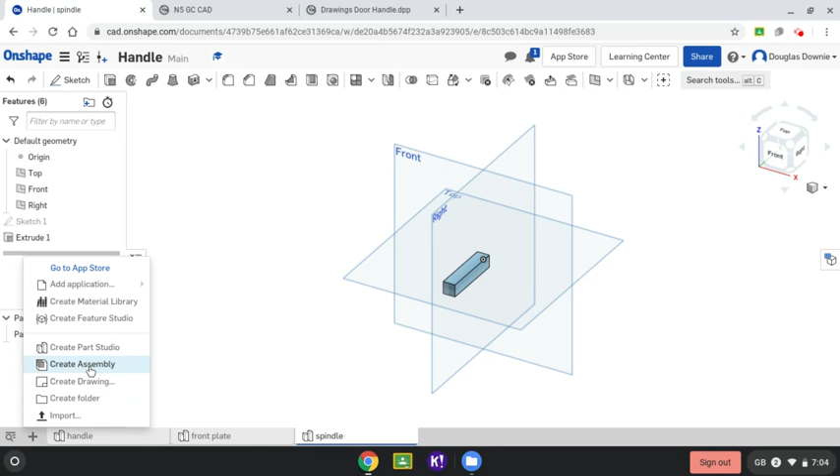So we're now going to the plus key and select assembly. We're going to assemble all three, and I decided I was going to start off by inserting the front plate.

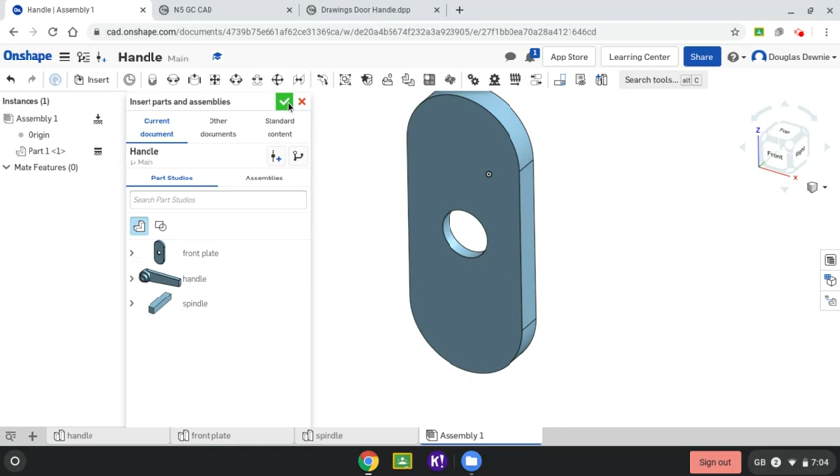Just click anywhere, right click, and then fix it. We're then going to insert the main handle. As you can see, it's kind of inserting sort of back to front at the moment. Anyway...

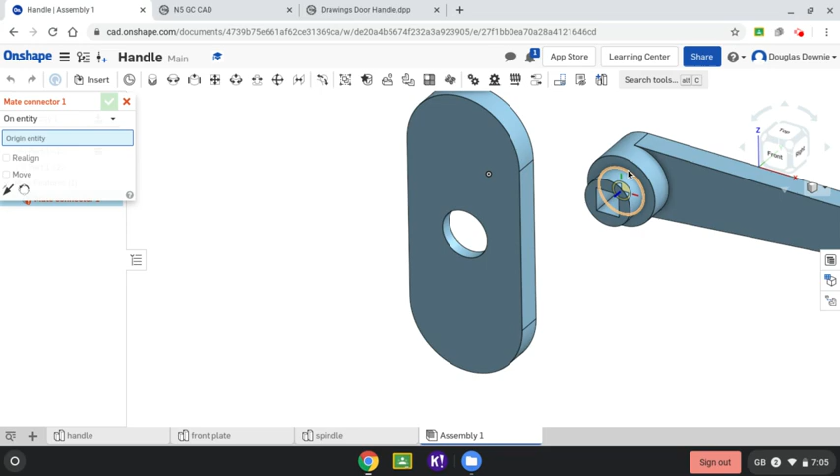So move that out the way just now. And then we're going to, remember, use these mate connectors. So I'm going to put a mate connector in here, and you can see it automatically selects the center of that circle. I'll just zoom in a little bit so you can see what I'm doing. So if I move it over, this is the surface I'm wanting, but it automatically selects the center.

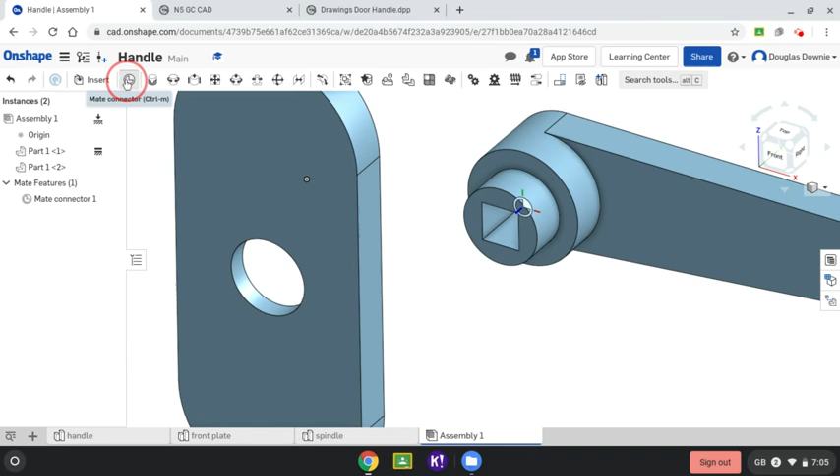Right, so you click, and there you go. You can see mate connector 1, click the green tick. And I want that to go there - this is where you've got to try and imagine where it's going to go. So I want it to be at the front. So that's mate connector 2.

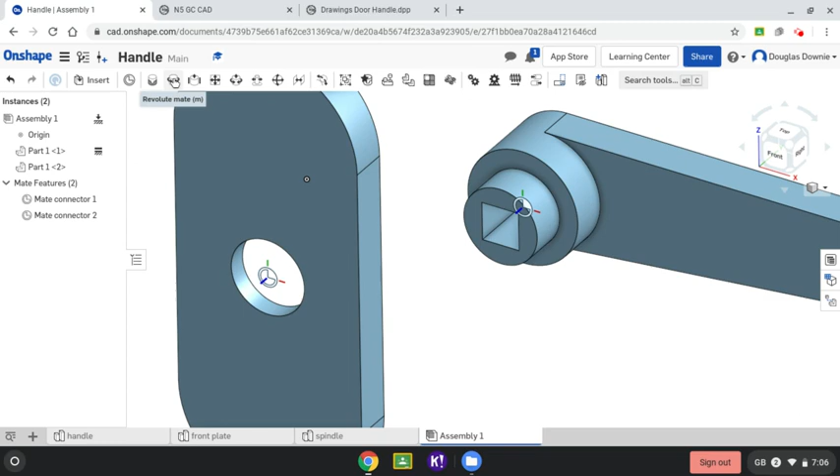And then we're going to join them together. Now what we're looking for in this particular case is a revolute mate - that one there. So I'm going to select that mate connector, and then I'm going to select that mate connector. And you can see it puts them together.

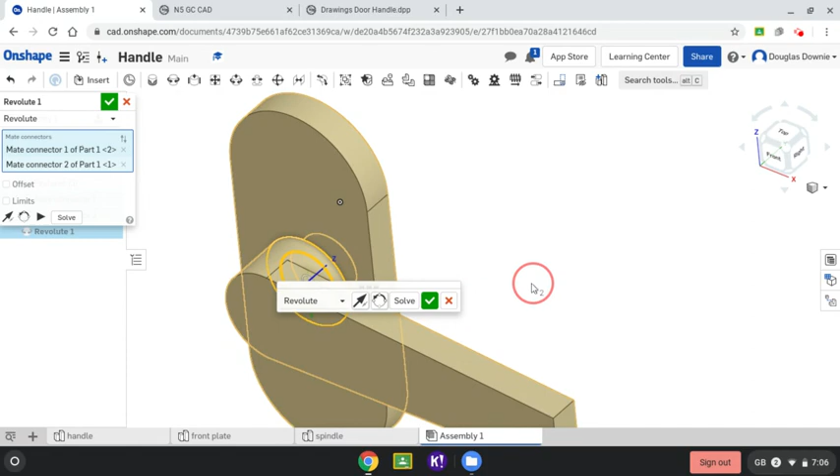But we've got to just do a few pieces here to get things totally correct. So the first thing we've got to do is change that and flip it around. So that flips it, which is definitely making it a little bit better. But you can see at the moment the handle's the wrong way around. The handle should be on the left-hand side, not the right-hand side.

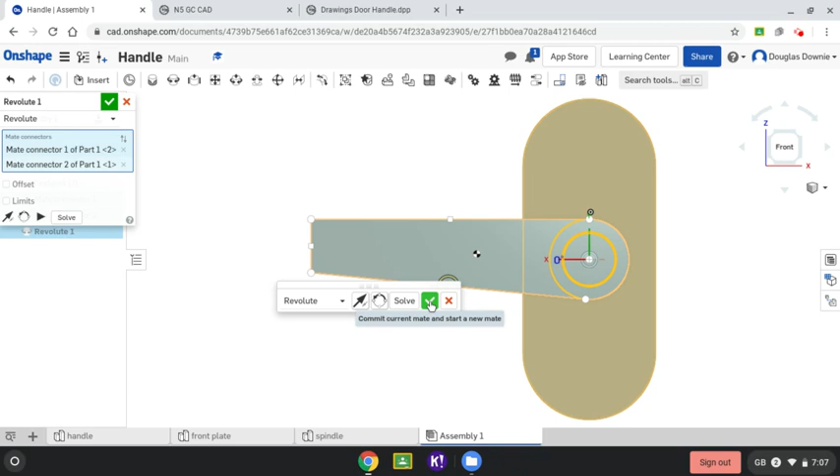So we're going to reorientate that secondary axis as well, and we're going to do it one more time. You can see it's now nice and straight - this is exactly the way we want it. So hit the green tick. Okay, so that's got the first part.

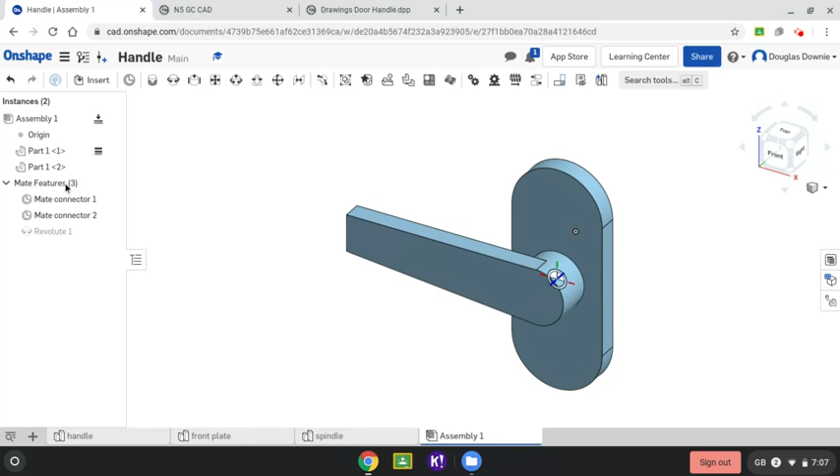Now what I'm wanting to do now is I actually need to turn off some of these things. So I'm going to, first of all, get rid of that, and then I'm going to right click. You can either do this on here or you can do it over here, depending what you prefer. But I'm going to turn off the front plate, so I'm right clicking and I'm going to go to hide.

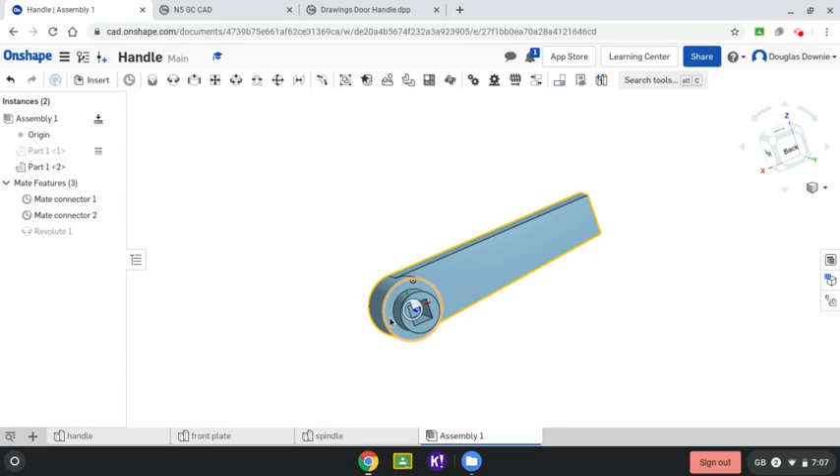I'm doing that so that I can see inside, because I need to see inside here to put the spindle in place. You can also see that the mate connectors are kind of getting in the road as well, so I'm going to turn them off too. I'm going to hide mate connector 1, and I don't need to hide mate connector 2 because it's hidden already.

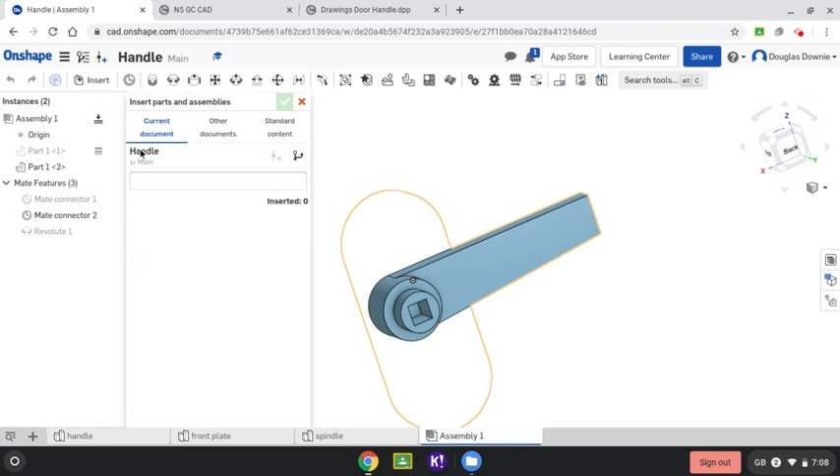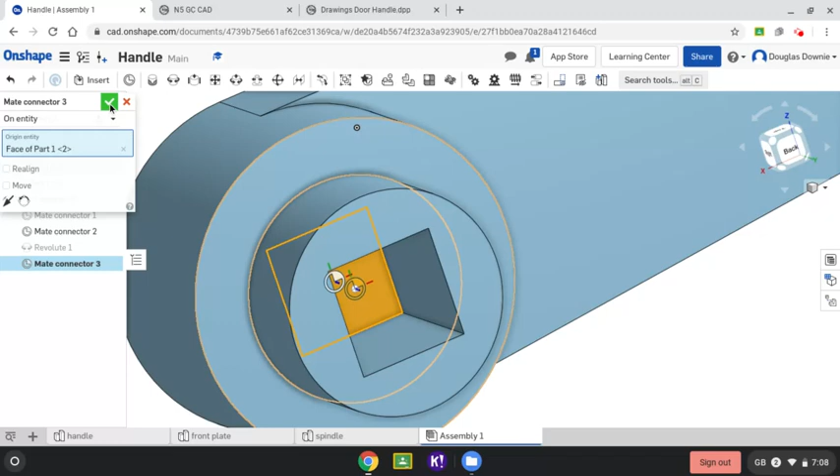Right, we're now ready to start going. So insert spindle, and just pop that in any place just now. And again, same as before, mate connector. Now this time I'm going to zoom in here and I want it to try and get into the back one there. Just use - you can see the orange line shows you that that's correct. So that's that mate connector.

And I want another one there.